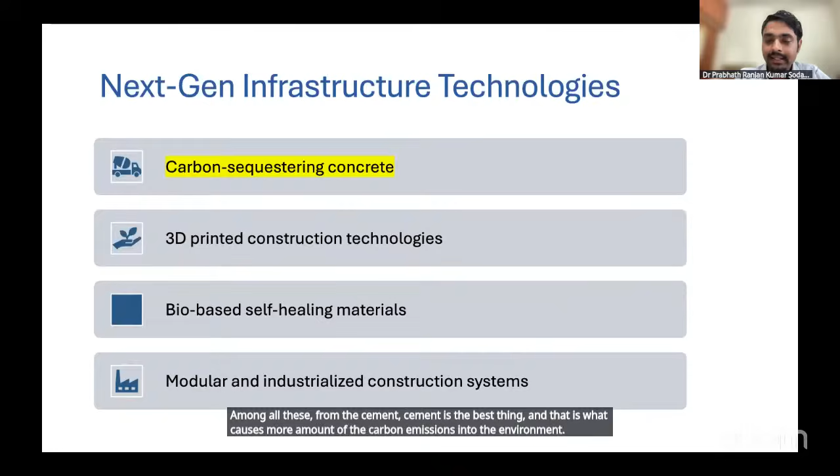The basic ingredients to prepare concrete are cement, fine aggregate, coarse aggregate, and water. Among all these, cement is the worst offender, causing the most carbon emissions into the environment. So how we can sequester this carbon dioxide is a major problem.

My professor, when I was working as a postdoctoral researcher at IISc in the Center for Sustainable Technologies, Professor Souradeep Gupta inspired me to work in this specific area, and I also got inspired by several research outcomes that occurred during the process of the research.

The basic information is that 30% of global industrial CO2 emissions are mainly because of cement production, out of all industrial emissions, whether you consider EV, electrical, or other engineering sectors.

India, among all countries, is the second largest cement market globally with continuous and growing production volumes among all sectors or countries. One more major problem is the scarcity of river sand.

Now there is a movement called Save the Soil, Save the River. If you continuously dredge out the soil existing in the river for construction purposes, there are a lot of changes in the ecological cycle because that changes the movement of the river, and other problems occur.

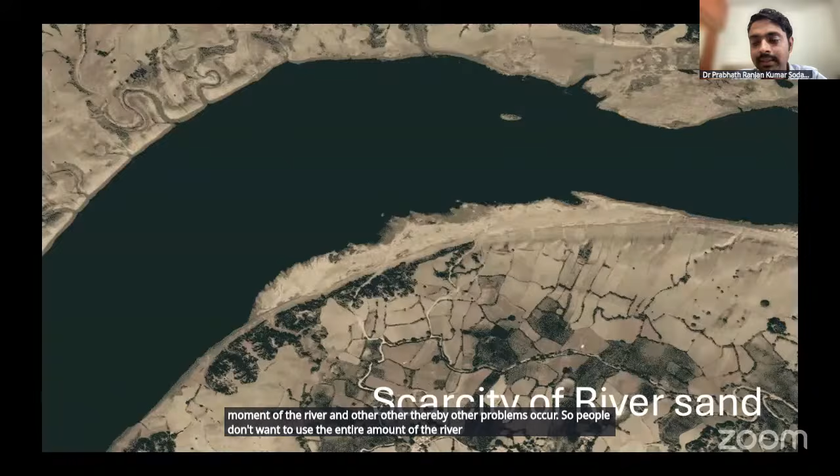So people don't want to use the entire amount of river sand. That's why there is a movement to reduce the use of river sand. This is one specific problem, and carbon sequestration is a basic solution for it.

So to address this problem of avoiding river sand, utilizing excavated soil from C&D waste is surely one solution—using locally available soils. We experimented with carbon sequestration instead of using normal fine aggregate received from river sand. We also did not use RoboSand or M-sand.

We utilized locally excavated soil, whatever soil is available near the construction sites. For example, when we try to construct a foundation, what happens? There will be a lot of soil available due to the excavation process as a pit.

The soil is directly utilized as fine aggregate and incorporated into 3D printing, and we have beautiful outcomes from that. So again, introducing the CO2—just now we discussed there is a lot of CO2 causing changes in the environment.

So this amount of CO2 emitted from the cement manufacturing process can be utilized as a positive aspect when we use the CO2 gas as a curing gas. We know concrete should be cured immediately after casting, after demolding.

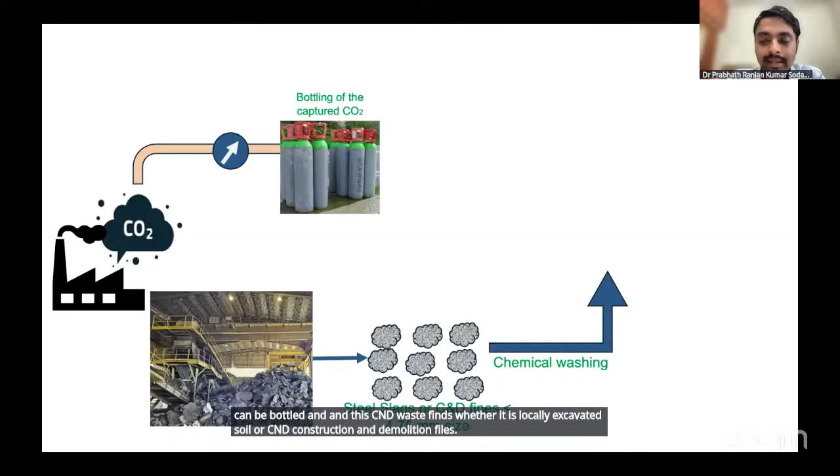So when we expose these concrete structures to CO2 gas, what happens? The basic science is that the carbon dioxide emitted can be bottled, and these C&D waste fines—whether locally excavated soil or construction and demolition fines—can be chemically washed and also utilized in the sequestering process.

That is one way of sequestering carbon dioxide into the aggregates, and the structure itself can also be exposed to this carbon dioxide gas, which will sequester the carbon dioxide and form calcium carbonate.

The basic science is that carbon dioxide reacts with calcium hydroxide, a byproduct of hydration. When cement mineral reacts with water, it generates a gel, CSH gel, then calcium hydroxide. That calcium hydroxide reacts with carbon dioxide and generates calcium carbonate.

Not all calcium hydroxide is reactive. We need a specific pressure, a specific humidity, and a specific temperature where the maximum amount of carbon dioxide can be sequestered.

That is what sequestration means—we are permanently converting this carbon dioxide into calcite, unless you heat the calcite again to convert it back into reactive lime and CO2.

So construction sectors, or prefabricated industries, can adopt this kind of science of curing using carbon dioxide and improve strength as well.

It also improves the strength because this calcium carbonate will densify the structure, then enhances the compressive strength, and enhances the durability and permeability, reducing the permeability.

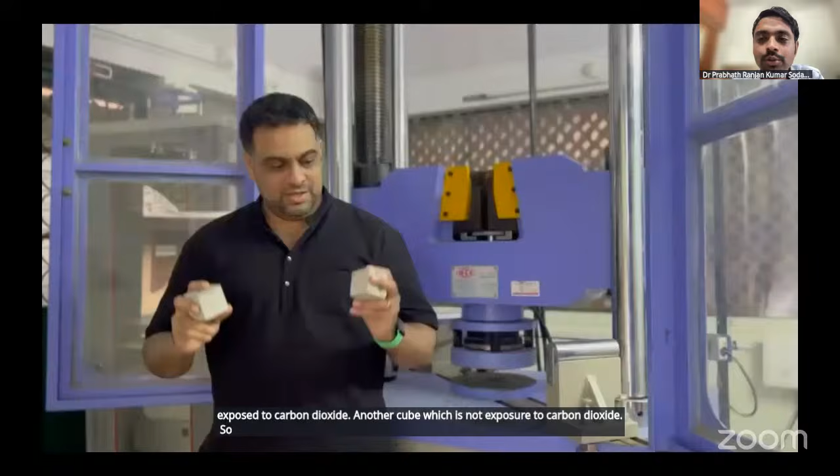He's a professor, my inspiration. From him I have learned a lot of things. In his hand there is one cube which is carbon sequestered, exposed to carbon dioxide, and another cube which is not exposed to carbon dioxide. He experimentally showed what is the difference in strength between these two cubes.

So I have two building blocks in my hand. One is made using Portland cement and natural sand. Another building block here is made using Portland cement, CO2 treated recyclable fines, and then cured using our CO2 curing technology. What I'm going to do is subject both of these cubes to a strength test, and let's see how they perform.

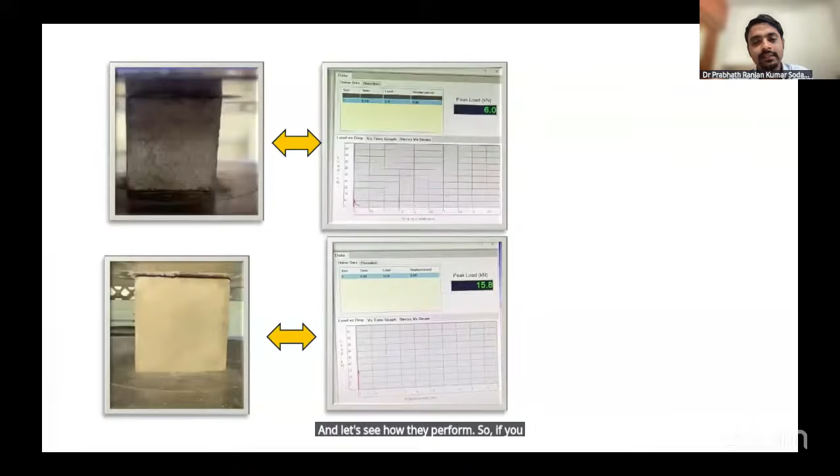So under specific loading conditions, the one which is actually there first is block 1, strength due to conventional curing. That is, conventional curing is generally where we cure in normal water, so we get the normal strength, whatever is expected. The strength of the second block shows a 30% hike in strength, the load carrying. The failure is...

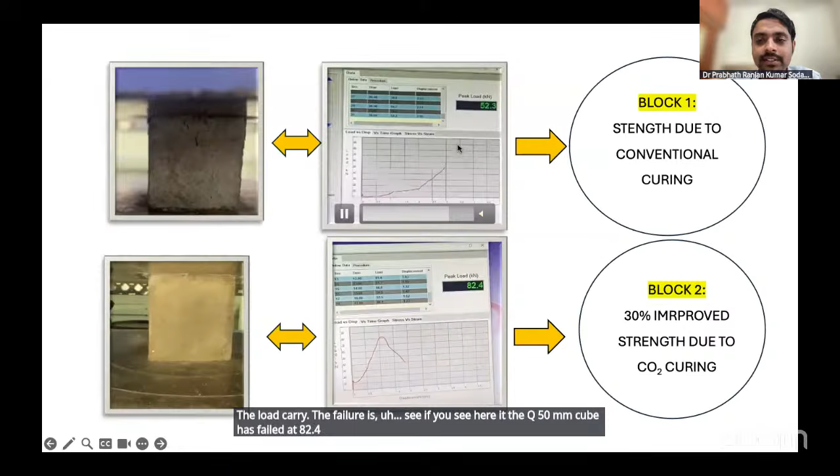If you see here, the 50 mm cube has failed at 82.4 kilonewton, and the conventional cube has failed at around 52.3, it will be close to that.

So this is the strength difference on the first day itself, the very first day. Carbon sequestration can be done in the initial days only. After casting, immediately we must expose this, because that's when the maximum amount of calcium hydroxide availability will be there for the reaction process of the CO2. So this CO2 basically mineralizes into calcite, improves the strength, and permanently stores into the infrastructure. This is how carbon can be sunk or absorbed directly through this reaction process.

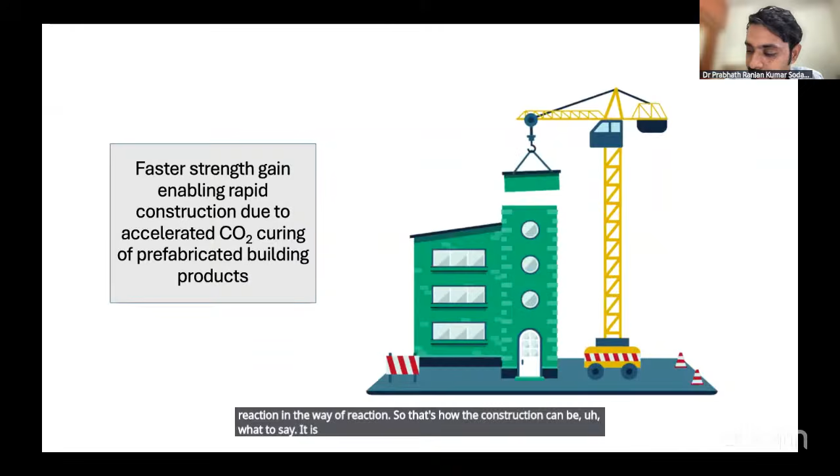So that's how this is one of the important aspects for the demolding process, faster demolding process, as well as faster deployment of the structures into service. So it is useful in that way.

And second thing, very important, is that everyone is interested in 3D printing. With 3D printing, although we don't need any formwork for constructing almost any type of structural framework, we can avoid molds, and we can construct any shapes, practically impossible using molds, can be done using 3D printing, as you see in this picture.

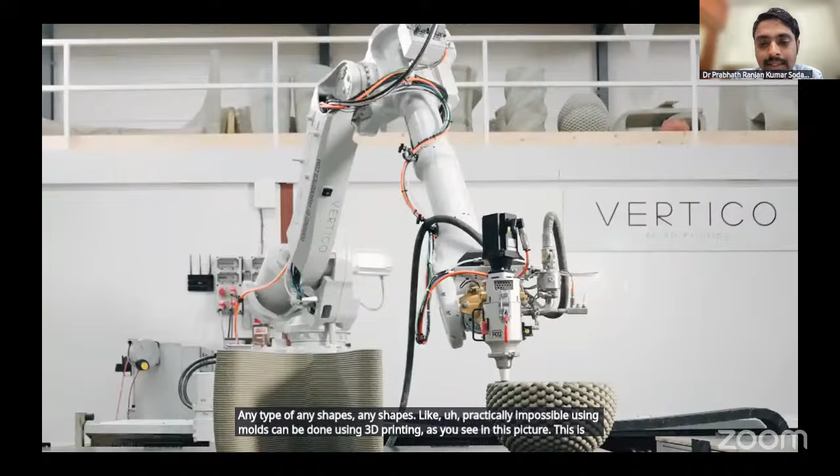This is one of the 3D printers, called a robotic arm 3D printer, using which we can construct up to a certain height. There are also other types of 3D printers available in the market, like gantry-based 3D printers, using which there is a limitation of height. Until the height of the gantry only, the structure can be printed. So there are limitations as well, but the process is very quick.

You can construct a wall within a day. In fact, if you properly utilize the resources, you can construct a structure within a day. It all depends upon the science of development of the material itself.

It's just like when we press a toothpaste tube, what happens? Material comes out, the paste comes out, but the paste will not collapse on its own, it retains its own shape on the brush, right? Similarly, if you design the material using specific chemicals or viscosity modifying admixtures, the layers will retain their own strength. This process is called buildability, a specific technical term.

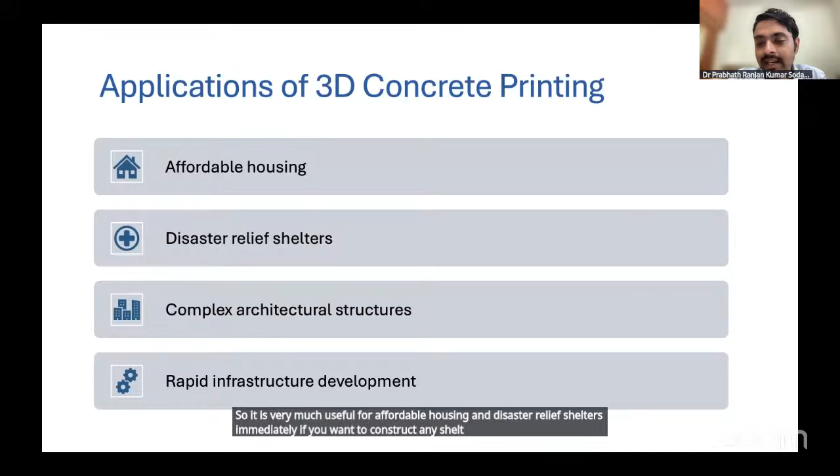I'm not going into too much technical detail of 3D printing, but I'll just show the applications of 3D printing here. It's very useful for affordable housing and disaster relief shelters. Immediately, if you want to construct any shelters, complex architectural structures can be printed, enabling rapid infrastructure development.

The color looks different from cement because we have not used only cement. We have used locally available soil, that is clay soil, which is actually non-expansive clay soil. That is, the mineral which causes expansion is montmorillonite in the clay.

So we choose a material which is not having montmorillonite, or at least having very less amount of that. We choose it, sieve it, and dry it. We directly developed the mixed formulations and started printing.

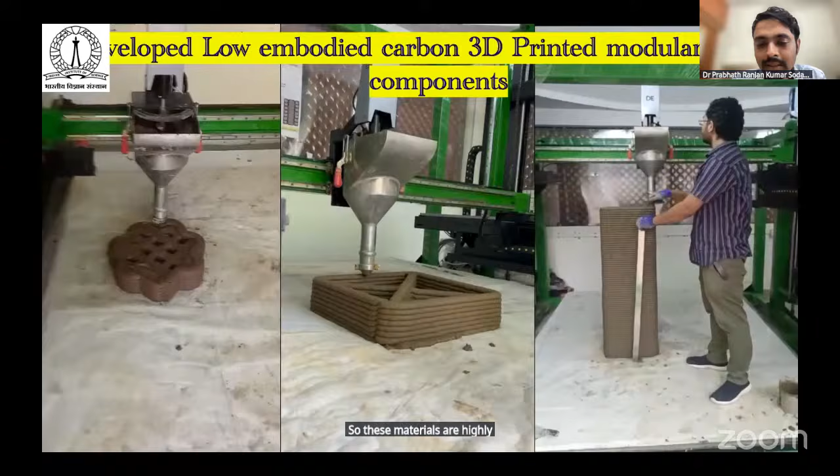These materials are highly low embodied carbon materials, because we are not using high amount of cement in this - we used very 30% cement only. It's very less. And there is another research using geopolymer, with almost zero cement, and 3D printing was awesome.

Structures were constructed at IISc. When you visit Bangalore, you can visit our printed structures still available at our research facility.

Apart from that, this is one wall - an attempt to construct a wall has also been done. So like this, we can construct. The time taken for this is around 2 hours.

Our research scholar has printed this, and it was modeled in Fusion 360. Then it is transported to the computer, where the printer changes it into layers, then it is printed. So this is another research, parallelly done with our collaborated university, IIT Roorkee.

We have done this as a part of our research work. They explored using their locally available soils as a fine aggregate replacement. And you can see there is a lot of discontinuities in the surface, in the quality of the layers.

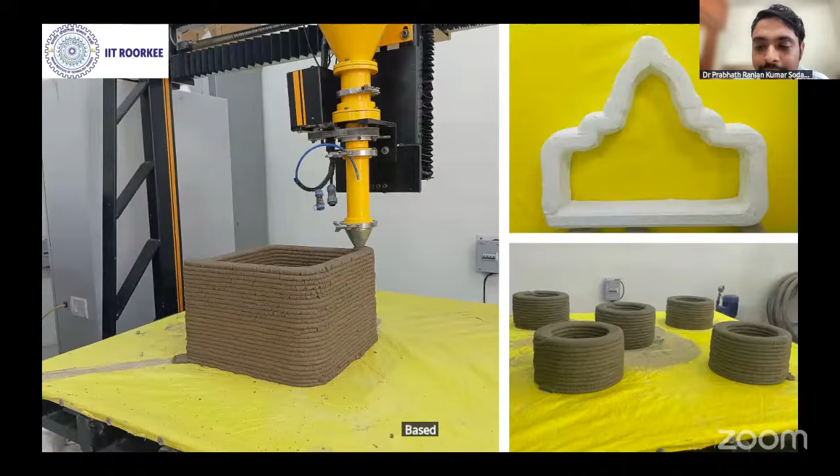From this, we can learn that there is a difference in the quality of the layers, quality of the printed material based on the ingredients that we use. Not all the locally available soils are useful for printing - we must test basic tests.

So these are certain other things which they successfully printed with a good extrusion quality of the layers.

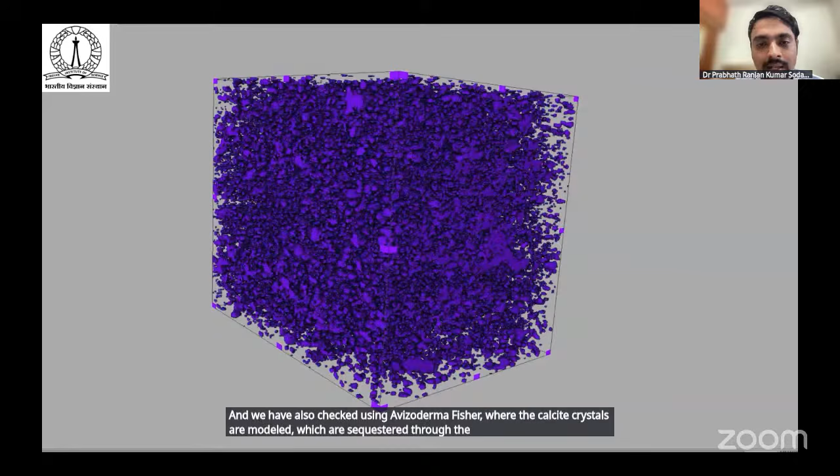So it's a highly densified material. In the cube, a specific portion was analyzed using this - it's a modeling, basically 3D rendering of calcite crystals.

So that was my research at postdoc. And as we discussed, the whole world is looking towards the sustainable goals, especially in the construction sector, which we are responsible for as civil engineers, to develop a resilient infrastructure, cleaner construction technologies through C&D waste and CO2 utilization.

That's what specifically we are addressing - sustainable cities and communities by maximizing the utilization of CO2, and responsible consumption and production by promotion of C&D and excavated waste recycling as new building materials. Obviously we require less resources, and at the same time we can utilize high amount of available resources.

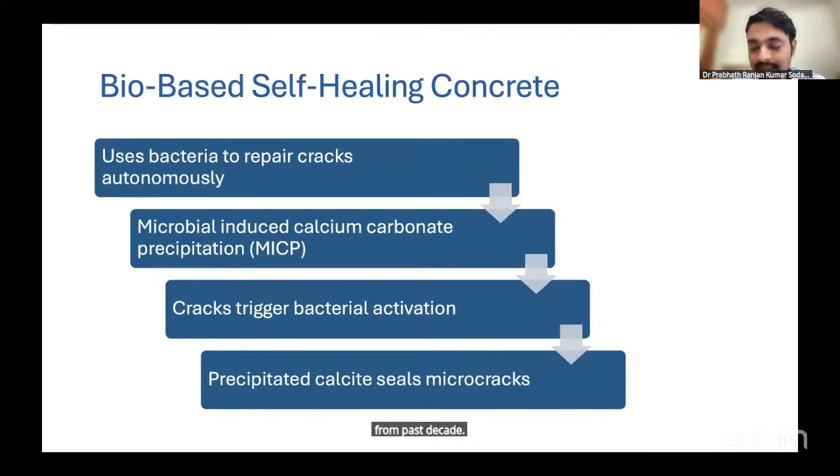Then the third important technology is bio-based self-healing concrete, or self-healing concrete, which is also a very much focused element or research aspect by several researchers on the globe from the past decade. In fact, my doctoral work is focused on this healing of micro cracks.

So basically, healing can happen in two different ways - one is natural healing and artificial healing. Natural healing means that cement itself, or concrete itself, when a crack occurs, naturally, because of the availability of secondary hydration products, a certain amount of the crack will be closed.

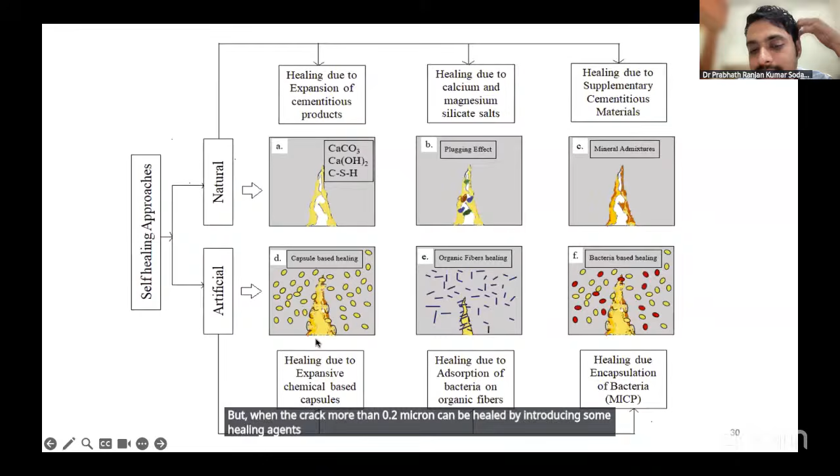That healing is limited to 0.2 microns, not more than that, so that healing is not going to close the entire crack. But when the crack is more than 0.2 microns, it can be healed by introducing healing agents artificially, which can be chemical based, organic fiber based, or by encapsulating bacteria.

I took the opportunity to explore the healing efficiency of bacteria, especially those which precipitate calcite. Calcite is abundantly available on Earth. In our bodies, whatever we eat forms certain chemicals that become calcite through our bones and teeth. We all have calcite in our bodies. Similarly, certain bacteria have the ability to precipitate calcite, called calcite precipitating bacteria.

That bacteria can be encapsulated into lightweight aggregates, polymers, or specific materials. Then those encapsulated aggregates can replace normal aggregate. This is the process of forming the aggregate, incorporating it into cubes, then testing the healing efficiency after several days and at several concentrations.

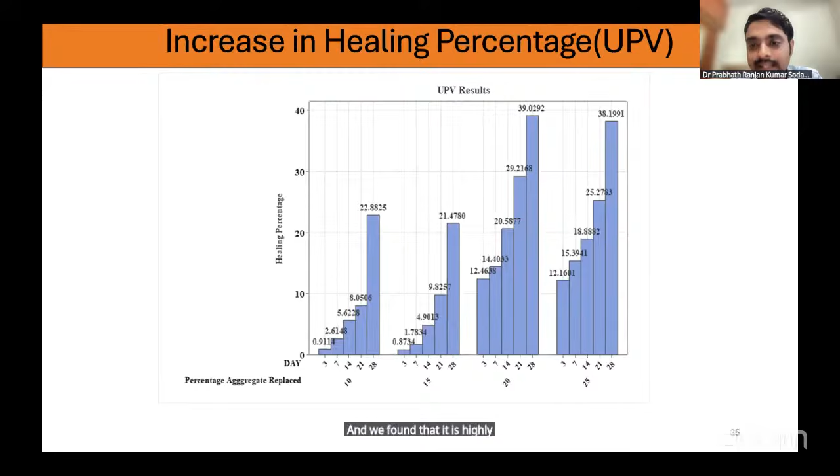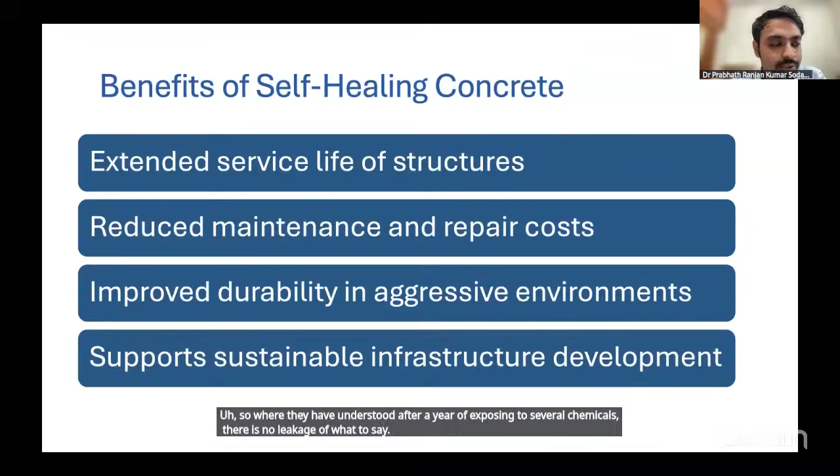Benefits of self-healing concrete include extended service life, and there are already people experimenting in Denmark. They constructed a beautiful structure, a 1,000 square feet slab, where after a year of exposure to several chemicals, there was no leakage due to chemical exposure. So we can avoid repairs if we adopt such things.

And the final technology is modular and industrial construction systems. Currently I'm working in modular housing, where people are experimenting with directly constructing volumetric pods, optimizing topology, reducing material utilized and weight of the structure without compromising performance—minimal on-site work and direct transport to site. One specific thing is utilizing EPS panels along with ferro cement.

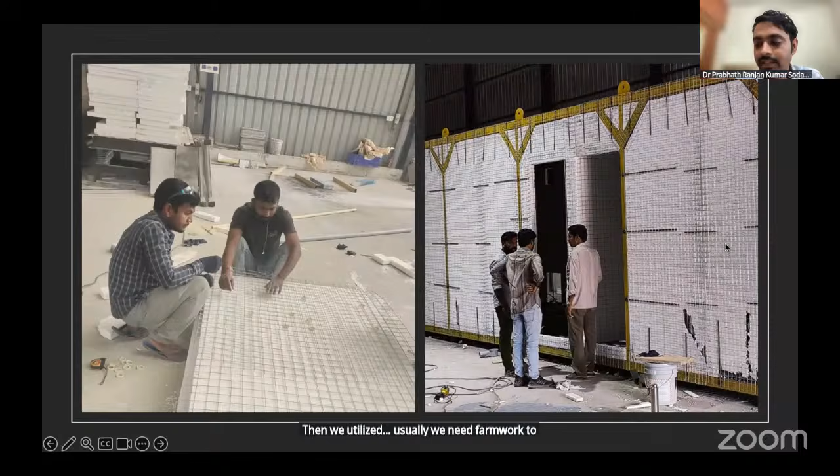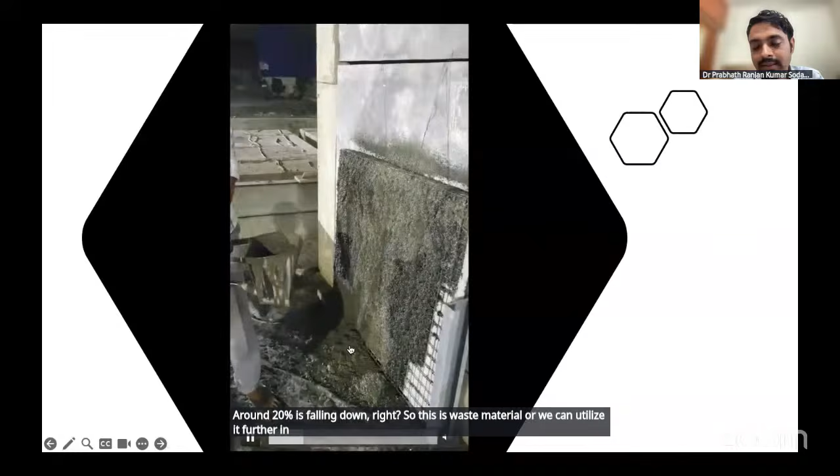Usually we need formwork to pour concrete, so to avoid that, I myself developed a specific material for spraying which should adhere onto the EPS panel. You can see here how this material is sprayed over the panel, so that the rebound is very minimal. Rebound means, if I spray 100 kgs of material over the panel, around 20% falls down—this is waste material, or we can utilize it further in finishing or other aspects of construction.

Basically we can reduce construction time using this method. One example is that we can utilize it for construction—this is at an experimental stage, what you're seeing in the video. Using this, we constructed a complete pod within days—actually 6 to 9 days total, including finishing and painting works. We can do this almost entirely if we have enough resources and people to support it.

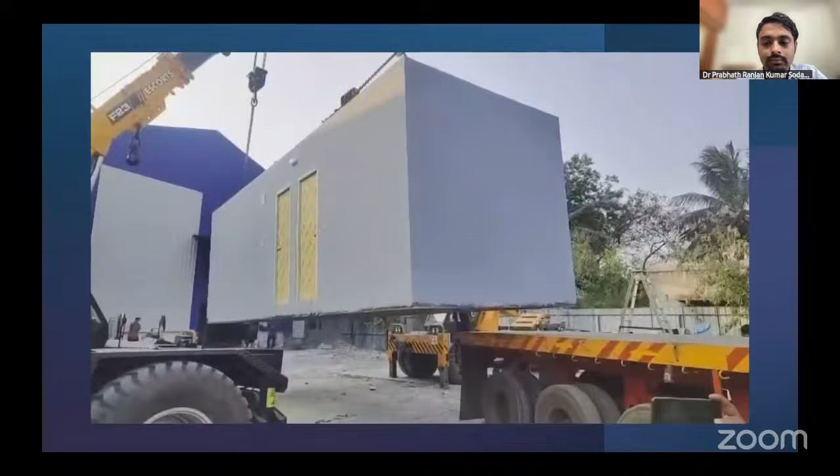Certain technologies like that already exist and people are bringing a lot of R&D into it. I am currently working to develop material, optimize the mix, and develop structural shapes. In future, the integration of digital construction into BIM, building information modeling, AI-driven design optimization, robotics, automation, and digital twinning are certain topics of great interest to researchers.

At my university, 20 people are working on digital twins, so people can explore anything. In the process of perfection, we are achieving certain products—this may not be a perfect product, but for the specific point in time and the specific problem, that is a solution.

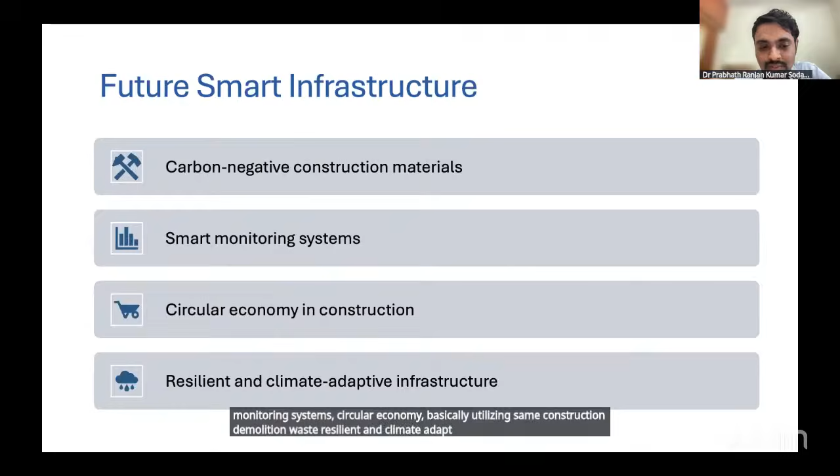If we are able to provide that, that's when our education is very much useful. Future smart infrastructure, carbon negative construction materials, smart monitoring systems, circular economy basically utilizing construction and demolition waste, resilient and climate adaptive infrastructure - these are certain interesting topics people can focus their research on if interested.

Everywhere people are exploring this in materials. This is my domain, so I am telling these aspects. I think I have consumed a lot of time, I'm going towards the end.

That's the key takeaways: infrastructure must transition towards lower carbon materials to avoid these things, and emerging technologies enable sustainable construction like modular construction, and integration of biology, material science, and digital construction, which lessens the time of construction and satisfies the demand of construction needs in society now, given rapid population increment and their needs to be satisfied.

Innovation will define the future of infrastructure. There is obviously room for innovation. People are thinking and implementing their thinking in products, which can cause faster construction technologies.

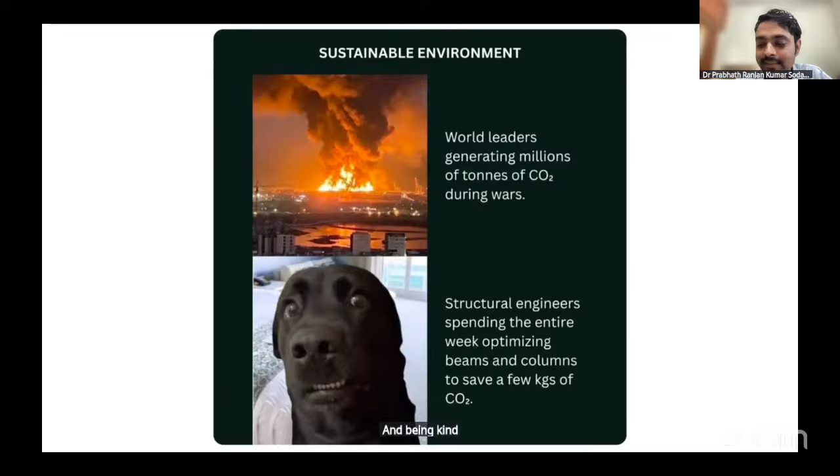Although I don't want to bring this down, we are all working day and night to reduce carbon emissions, and there are leaders causing generation of millions of tons of CO2. Although it's funny, the fact is that meaningful decisions should be taken at specific times instead of causing problems to the common public. I'm connecting this to our topic just to raise awareness - being kind and humane is very important at this time, as well as being innovative and showing leadership.

Anyhow, thanks everyone for giving me the opportunity to present this and giving me a chance to be a panelist here. To the entire team, it's great work to bring all these people together. Any questions and comments are welcome, otherwise we can move to the next panelist. Thanks a lot.

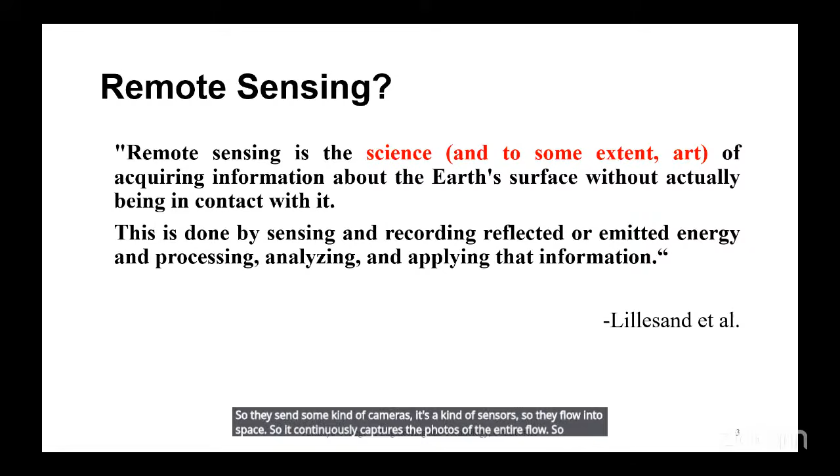So the same concept is used in satellites. Because how are you taking a photograph? Similar thing. They send some kind of cameras, which are a kind of sensors. They fly in space and continuously capture photos of the entire globe. Wherever we need, we can utilize that to monitor the changes that have happened.

So generally, when you look at remote sensing, there are different components. The first one is energy. You must need the energy. For example, there are two types of remote sensors: one is active, another one is passive. I will come to this in the next few slides.

So first, passive - the important source of energy is the sun. Because if the sun is there, the sunlight will fall on different materials and it reflects. So when it's reflecting, the sensor will capture that. It's simple, like a photograph.

When you take a photograph in good sunlight, it appears very clear and nice. But if your camera doesn't have any flash or something, if you take a photograph at night, you may not be able to see anything, right? Similar concept - we need sunlight as the source, which is reflected by the materials.

So that can be sensed by the sensor satellite, and that data will be transferred and downloaded from the satellite. It will be processed and analyzed, used for different applications. So this is the overall view about the remote sensing concept.

Here we need a medium, because the satellite is somewhere, the object is somewhere on earth, and we are receiving the signal somewhere, and we are processing and transmitting. So everything is being done in different places. We need a medium - what exactly carries the information? This is called the electromagnetic spectrum. You all know electromagnetic.

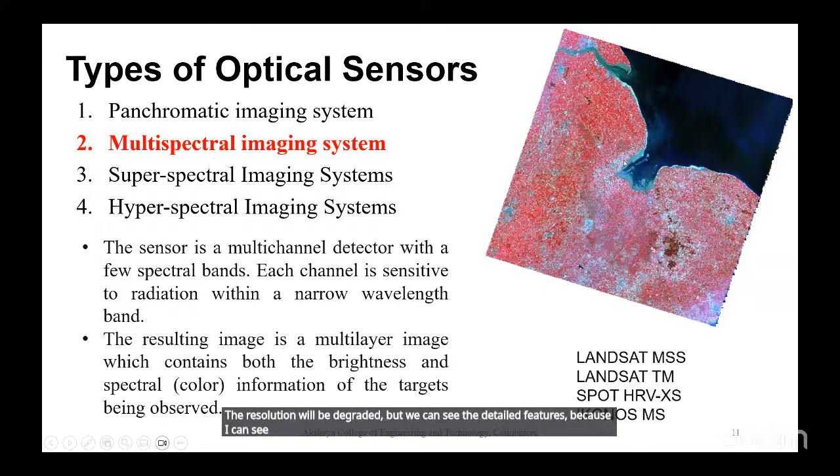Superspectral means it has more bands, okay, more spectral bands - it has 36 to 40 bands of energy, so we can see small changes. For example, if there's lake water or pond water, how much algae is there in the water, more greenery - even water itself, I can distinguish different things when you have more spectral bands.

Another one is hyperspectral. This is more advanced - you can use it for various applications. For example, a crop - whether it is healthy or has any kind of disease or water stress, or for geological applications, you can see if a particular area contains any kind of material like gold or silver or something, because it is very minute.

For example, take red color itself - everyone is wearing a red color t-shirt. Or in your university, they tell everyone tomorrow is a green day, so everyone wear green dress.

So not everyone wears the same tone of green. Green will vary from dark to light. There are multiple shades, so each and every differentiation in color can be easily identified using hyperspectral data. It has multiple spectral wavelengths, which can be reflected more precisely based on small changes in the characteristics of the targets.

So another one is the spatial resolution, which is very important, because it depends on which application you are using it for. For example, if my application is to monitor buildings in the university, I need more detailed information. Satellite data may not work, so I can use a drone, which gives information at centimeter resolution.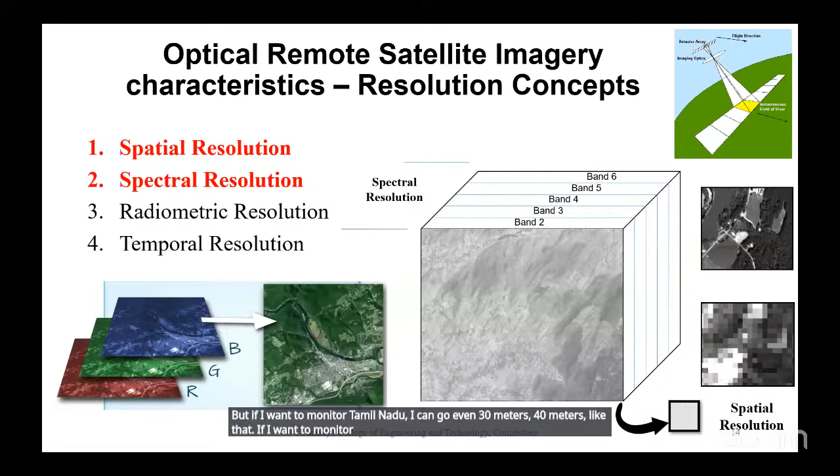But if I want to monitor the entire Coimbatore, I need a little coarser resolution, at least in meters. If I want to monitor entire Tamil Nadu, I can go even 30 or 40 meters. If I want to monitor entire India or the globe, I can go even coarser. So based on the application and the study, you have to select the spatial resolution.

Spectral resolution we have already talked about, so just skipping it here. Then there's radiometric resolution, which is very important, because there are 4 types of resolution. Spatial resolution is the pixel size, whether you are targeting a building, lake, entire Coimbatore, or entire Tamil Nadu, and you select accordingly. Spectral resolution is the colors, how many bands you are using for capturing things.

Another one is radiometric resolution. If you are using more radiometric resolution, you can get more detailed information. It's like when we purchase smartphones nowadays, what are the features you look at? The major thing is the camera's megapixels. If the megapixel is more, it's able to store more detailed information, meaning more radiometric resolution.

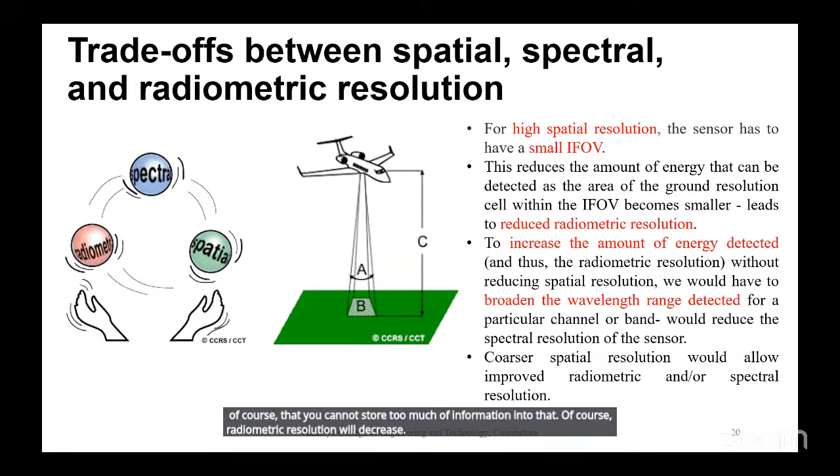But another important one is the temporal resolution. This is a must, particularly for monitoring infrastructure. If there are no hazards, no flood, no earthquake has happened, at least we need an image every year once, so that we can see any damage that has happened in the infrastructure. At that time, the temporal resolution need not even be 1 year; at least every month, if one image is available, that's enough.

But in case a flood has happened today, and I have one image from yesterday, if I have another image tomorrow or today, the temporal resolution is only 1 or 2 days. That is most important for disaster applications, because I can see, due to the earthquake or flood, how many buildings in that area have been damaged and what kind of buildings have been damaged, so immediate assessment can be made. And if a building is partially damaged, whether retrofitting or something can be done can also be assessed.

So far whatever we have seen is the remote sensing concept, the types of remote sensing, and importantly, resolution. There are 4 types of resolution: spatial, spectral, radiometric, and temporal. This is very important based on the application you are going to work on.

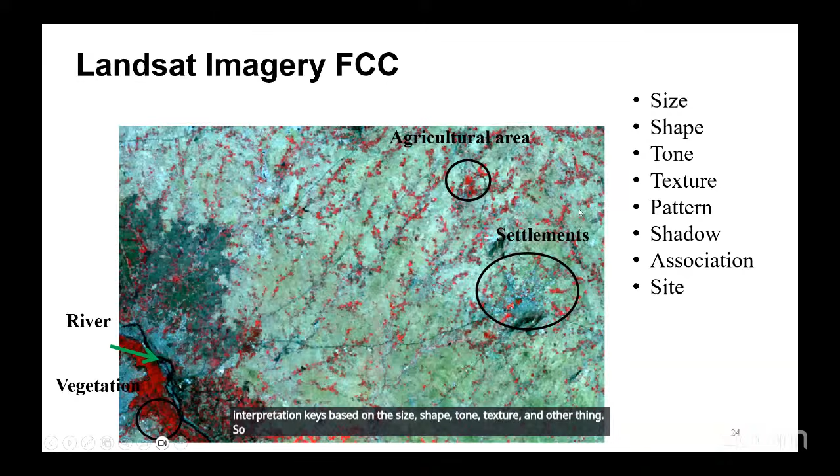There are various parameters you have to use, called keys. These are the interpretation keys based on size, shape, tone, texture, and other things. Based on that, you can classify the features in the satellite images.

For example, tone: if the tone is too dark or light, based on that you can see where more or less reflectance comes. For example, if there is a river, it's more smooth, mostly specular reflection occurs, so it will look dark. In a similar way, if there is vegetation, it reflects so strongly, so the tone, how bright or strong it is, you can classify based on that.

And there is size, which is very important. For example, there is a lake, pond, and maybe a river. Everything looks sometimes blue or dark colored. So how can you distinguish whether it is a lake, pond, or river? You all know, right? A pond may be smaller, a lake may be a little bigger, and a river may be a continuous system.

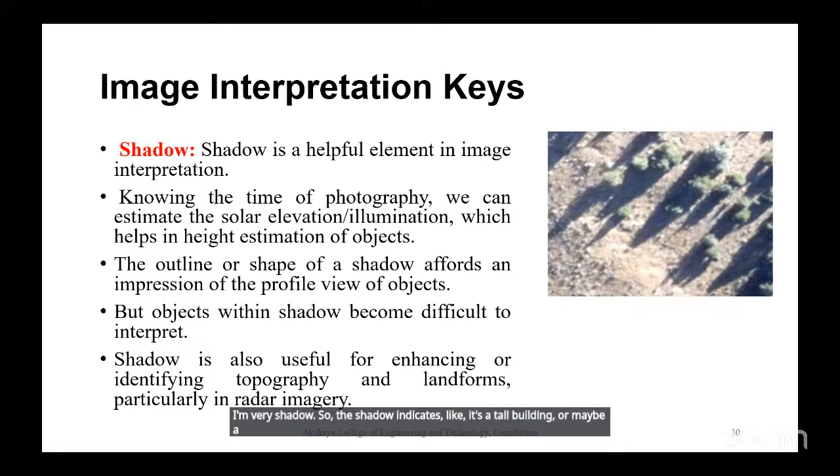Or maybe shadow - the shadow indicates it's a tall building or tall trees. That can be helpful to identify that there are trees there. And also association - you have to look at nearby buildings, what kind of other features are there. Based on that you can classify whether it's an industrial area, or a community, or maybe a cricket stadium. All these things you can classify.

So can anyone tell what exactly this is? This green mixed with some patches of gray color - how does it look? Now you know the interpretation keys. It's completely organized, so it looks like, of course, agriculture areas, because it's completely patterned and organized.

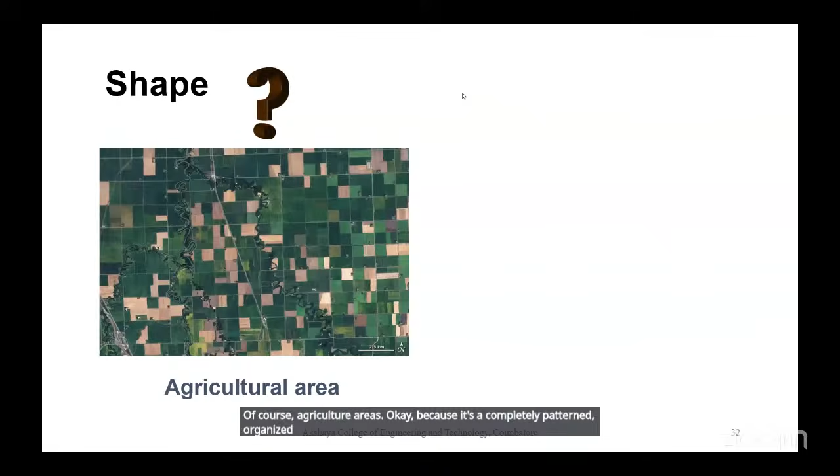That's what you have to learn when you look at a remote sensing image - to understand what exactly this is. I told you about association, right? There is one white building, and beside that there is a river going on, and maybe some good forest and other structures. What is this? I think most of you might guess - of course, it's the Taj Mahal.

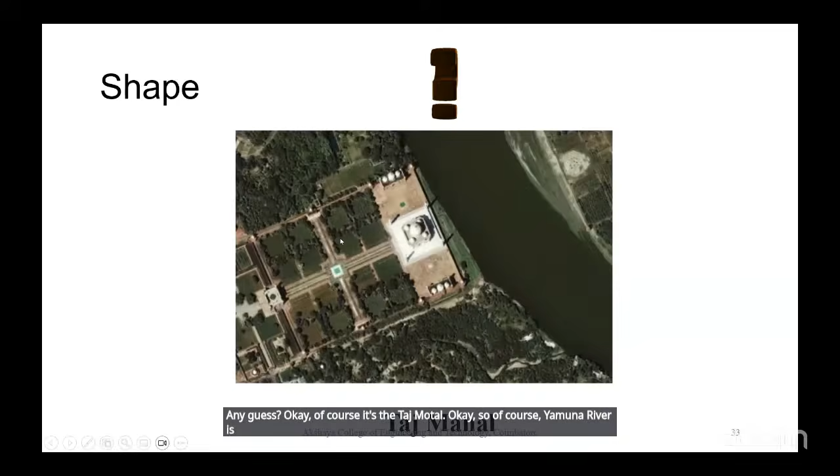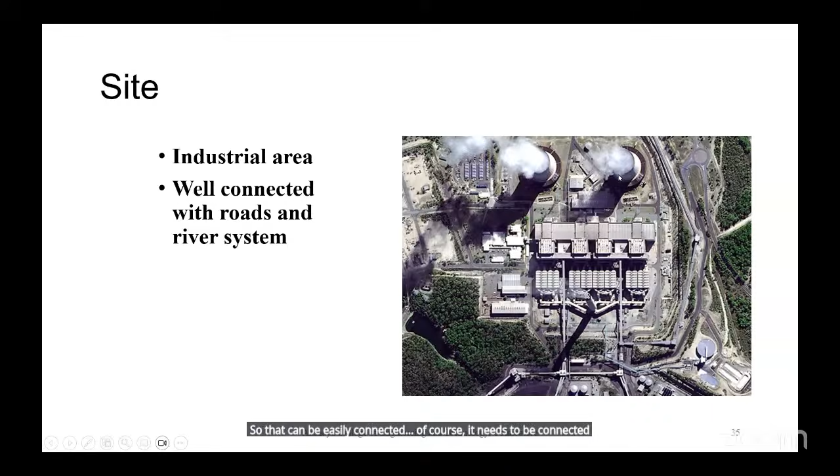Also tone - in different seasons, the same area, forest or something, the tone will change based on the greenery. That also you can interpret. Maybe as I told, association - an industrial area means the buildings may be isolated, not much other infrastructure nearby, because industry may be a little bit isolated. So that can be easily connected - of course it needs to be connected with roads and other things. Based on this you can easily classify. So this is how remote sensing concepts have to be utilized to understand the features.

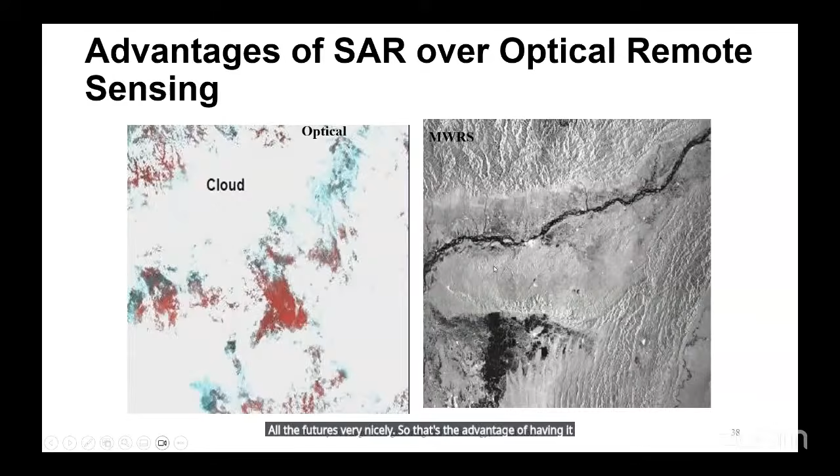Remaining part is completely cloud. But at the same time, if I capture the radar data, I can see all the features very nicely. So that's the advantage of having it. But it is only black and white. You cannot see any colors because it's a simple backscattering one.

So I'm just skipping these things. There are different applications you can use the radar data for. And I will directly go to the disaster - how these concepts of remote sensing can be used for disaster.

So there are various disasters that happened in India. Few of them I just put it here. The Kerala flood of 2018, and of course recently Wayanad also has happened. Many people dead, a lot of buildings and other things passed away.

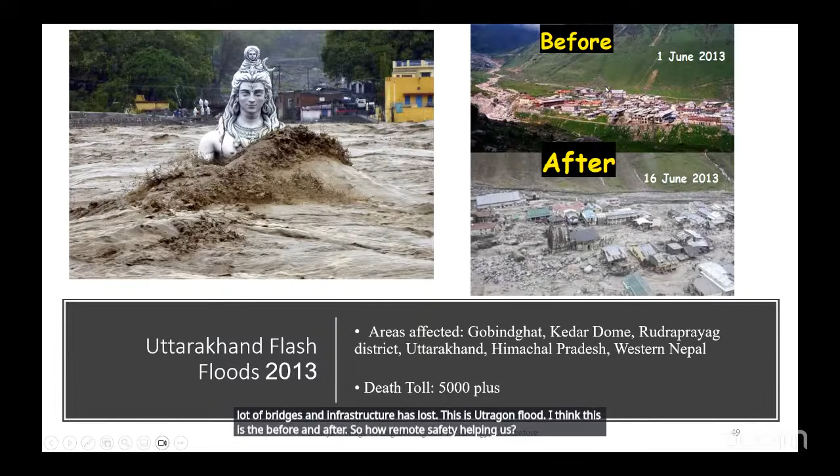This is the Kashmir flood that happened in 2014. Around 500 people dead, a lot of bridges and infrastructure lost. This is the Uttarakhand flood - before and after. So how remote sensing is helping us determine what buildings have been damaged, what changes have happened after the flood. And this is, of course, the tsunami.

So how will this remote sensing help? For example, this is New Delhi in '89 and 2018. You can see the changes - the purple color is almost red mixed with greenery. The purple color is the urban areas. So we can easily see Bahadurgarh and other areas were not much developed, Noida and all. You can see how the urban areas spread - urban sprawl, you can easily monitor.

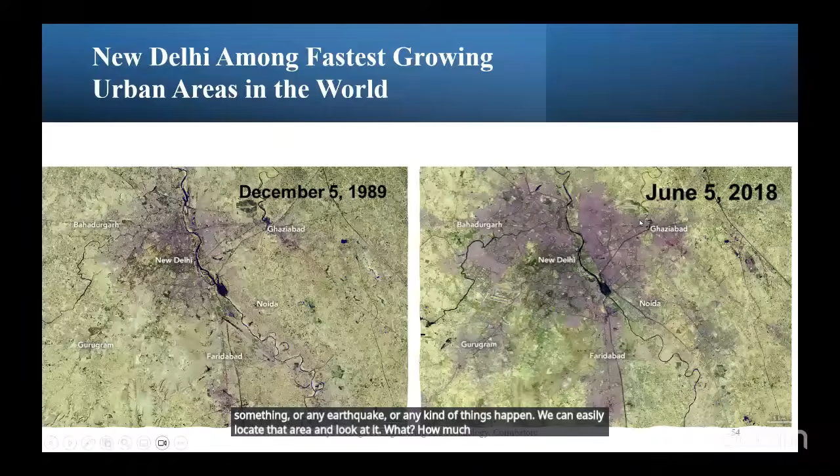This is the spring flood that happened in the USA. You can see how much the river width and other things have increased - overflow of the river system.

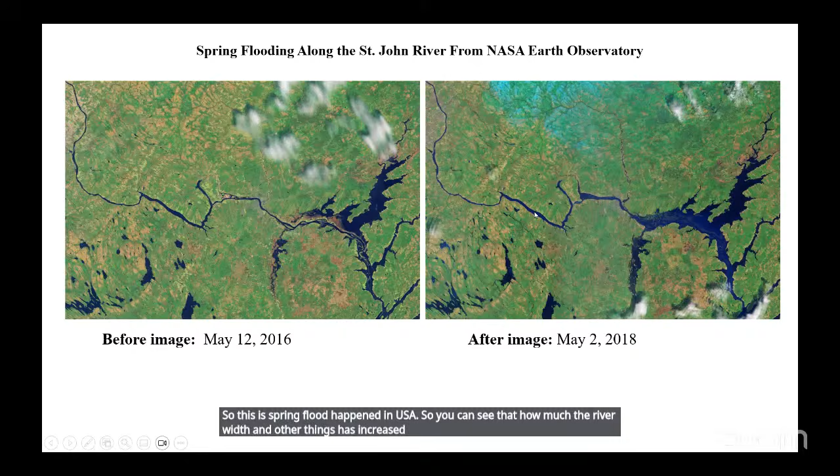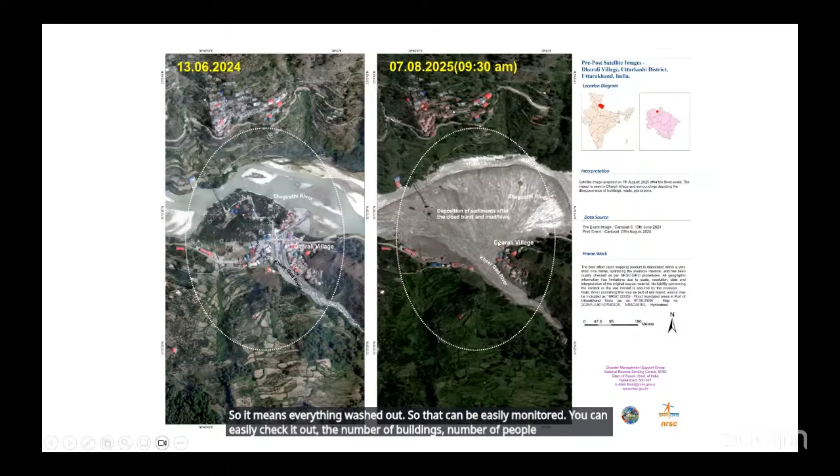And this recently happened, I think Dharali, Uttarakhand, due to that kind of landslide. This is before - you can see the buildings and other infrastructure, after that everything washed out. That can be easily monitored - you can check the number of buildings, number of people living there, how much has gone, how many people might have disappeared. All these things you can easily estimate.

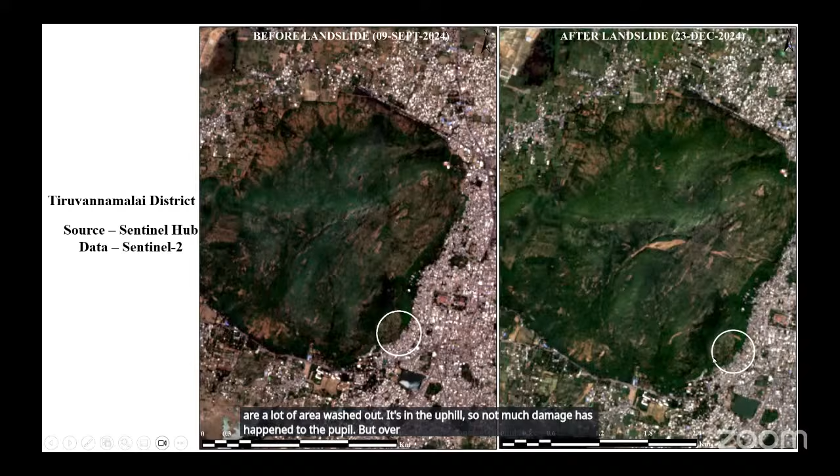Tiruvannamalai, we have that hill, right? Small hill. There was a landslide there, I think in 2024, about 7 people dead, including 5 children. So we can see this small hill. This is completely due to the rainfall. You can see there are a lot of changes that have happened in the hill, a lot of area washed out. It's at the uphill area, so not much damage happened to the people, but over this small area when the damage happened, a big rock fell down, so that 7 people died.

So this is a wildfire that occurred in 2025. This is the before image, you can see it's completely greenery. After that, this entire area has been washed out. You can easily map and see how much area in hectares has been destroyed due to the forest fire.

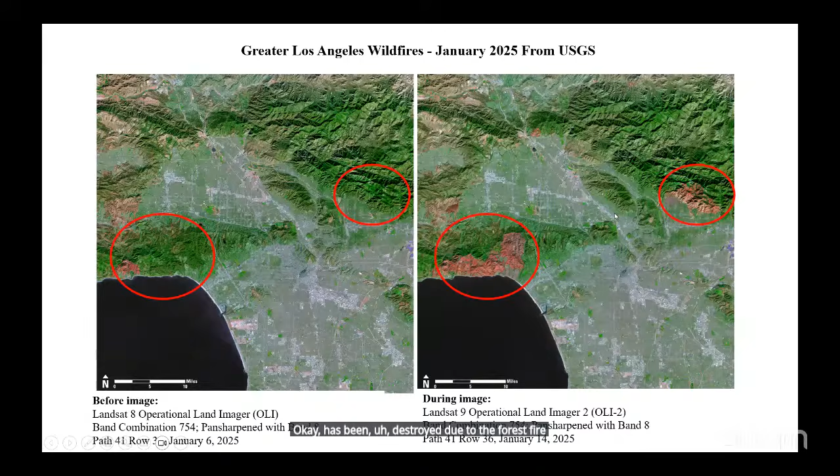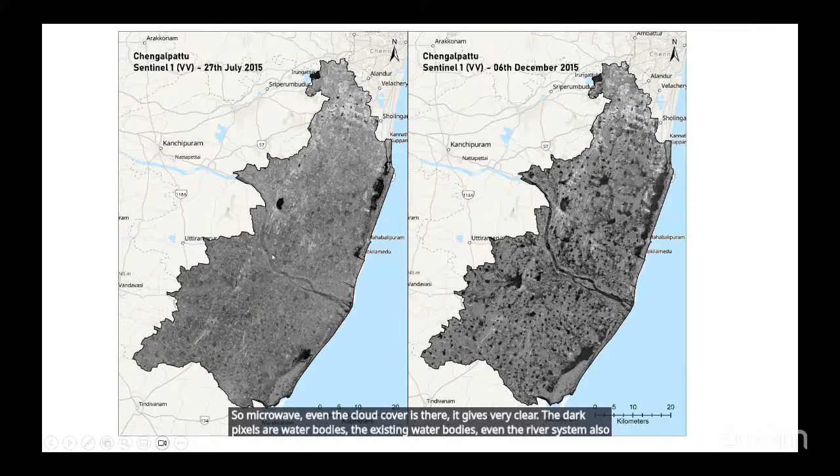So this is our Chengalpattu region. This is not optical data, so far whatever we have seen is optical. This is microwave data. With microwave, even when cloud cover is there, it gives a very clear picture. The dark pixels are water bodies, the existing water bodies. Even the river system was not having any water at that time, but after the flood, you can see how much water is there over that area.

So I'll just stop here. It means that we are having a very good tool in remote sensing. Now data is openly available, so this can be extensively used, based on the application and the area, to monitor infrastructure. Then, of course, based on that, remedial measures can be taken.

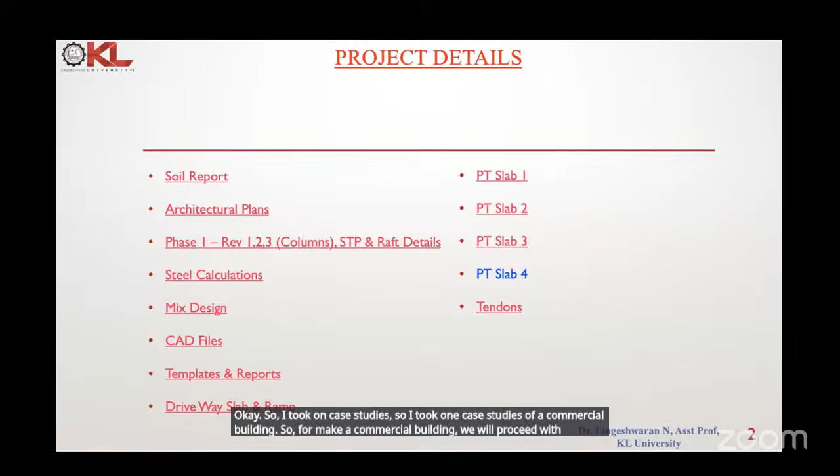I took one case study of a commercial building. To make a commercial building, we proceed with the soil report, plans, then details of columns, PT slab, PT beams, calculations, and structural designs. So many parameters will be there to start a project.

With this we have the architectural plan. So if we have the architectural plan, we will go with the structural plan and we will go for implementation on site. Why I am showing this architectural plan is, first of all, you have to know how the infrastructure is developing in and around the place and in and around the states.

Actually I am residing in Vijayawada. It is near the new capital of Andhra Pradesh, Amaravati. From my place Vijayawada to Amaravati it is around only 30 kilometers. So you can see here so much development. Recently they have given a new start called Quantum Valley, and so many infrastructures are developing here.

So I took one case study of what I worked on in this, to show how I came up with next generation ideas and how we can utilize the material further. So this is the architectural plan.

This is slab 1, PT slab 1. It is a total 4-story building. You can see this is PT slab 2, and the total area is around 35,000 square feet. This is followed by PT slab 3 and PT slab 4.

So the first 2 floors are taken by Westside, for purchasing those things Westside took them. And the third and fourth floors are occupied by a hotel. So this is the one.

So this is the time of construction, to get an understanding about the PT slabs. This is slab one, you can see.

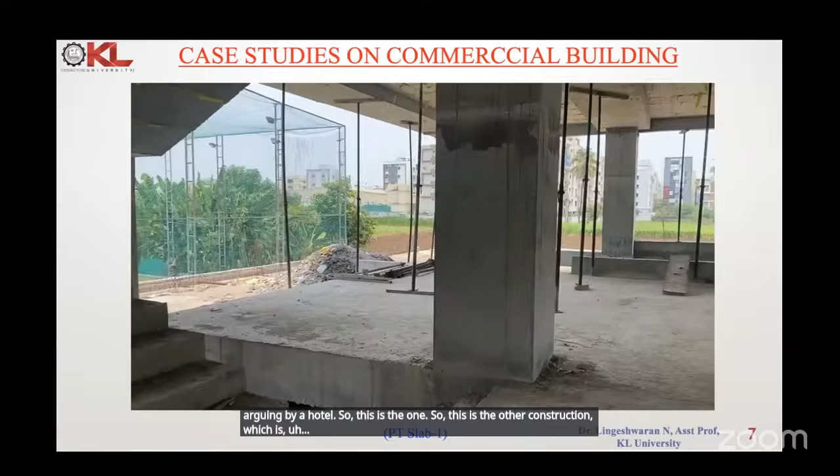I think you can see the video. Actually audio I didn't get anything, that's what I'm giving. So why I am showing this video is, the client wants the entire space and the utilization should be very clear.

So he doesn't want to waste any space. Anyway, you know when we go to the site, a client always wants to construct his slab area, everything end to end. So here the motto is how, by utilizing, we can come up with new materials, and how, if we go to RCC slab versus PT slab...

If I talk about PT slab, we can reduce the number of columns and the number of beams. For example, on this right side, it is around a 32,000 square feet plan area, but you can see we completed the total with only around 32 columns.

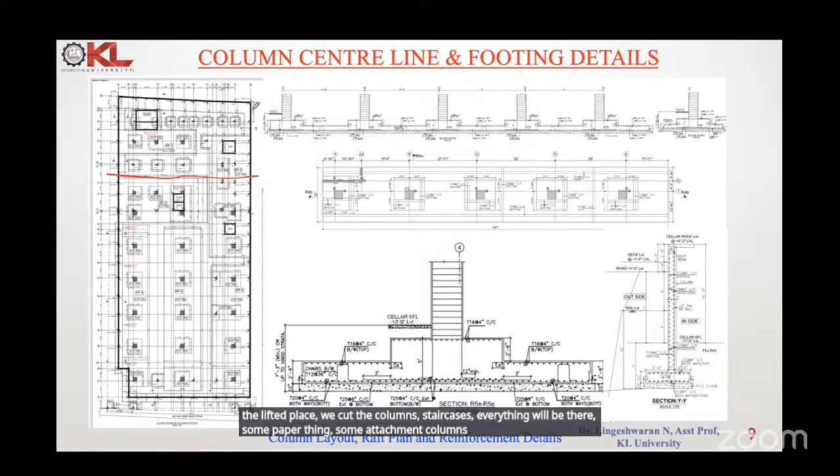So this is the main slab part 1 and part 2. In this entire thing we completed within 18 columns, and at the lift place we kept the columns, staircases, everything, some attachment columns. So when we go to the top, the columns get reduced. That's the reason we are going with PT slab.

So why I am showing this image is to show the resources, how much sand will be there. Actually it is very near to the Krishna River region, so in the Krishna River region the soil will be available, sir.

So when we go for footing, we have to go with a very heavy foundation. You can see here how the mat is there, bottom mat, top mat, and after the concrete. This is the one, the raft is completed.

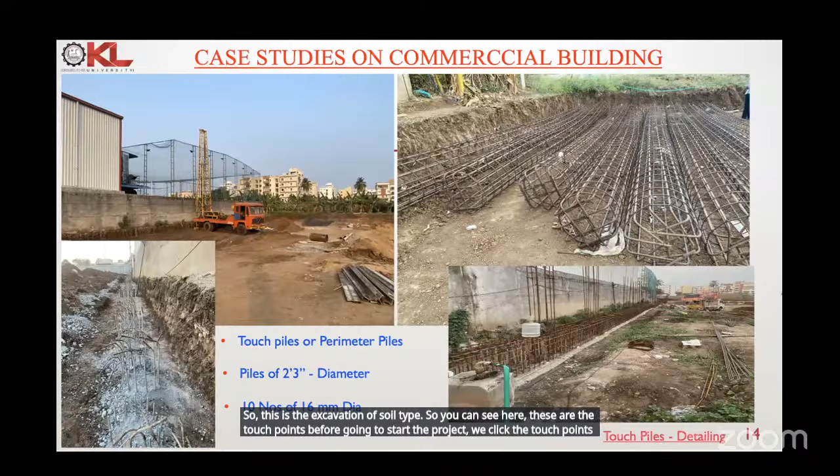This is the excavation of soil type. You can see here, these are the touch piles. Before starting the project, we kept the touch piles to resist the soil from falling down from the neighbor land or anything. That is the purpose. So you can see here how much PCC and how we are pouring the concrete using PCC.

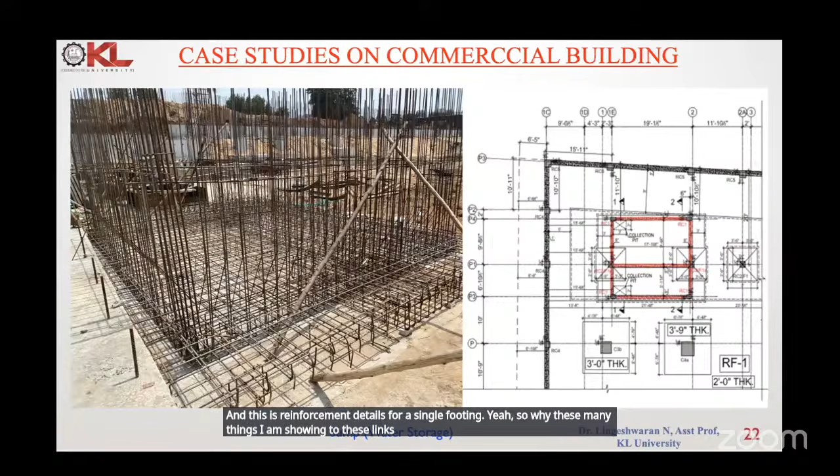So you can see here the quantum of concrete, reinforcements and rafts, everything. And this is concreting time. This is reinforcement details for a single footing. Why am I showing you all these things? You can see this is the sample details, and the concrete is going to follow.

So I first started with a commercial building. Like I informed, 4-story buildings, and for the 4-story building PT slab 1, 2, 3, and 4. Followed by I showed some raft footing. You can see here, this is raft 5. Actually in our entire 35,000 square feet area, we have a total of 5 rafts.

So in the 5th raft, this is the steel calculation. You can see we are using 16mm dia - 14.82 tons, 20mm dia - 21.21 tons, and 25mm dia - 9 tons. So total here we are using around 40 tons of steel.

So you can think about alternatives. Actually, this is the footing, so we can use GFRP bars. How we utilize GFRP bars in our lab, everything, I will show in the upcoming slides. So I'm giving a hint.

When we are going to give the structural design for a commercial building, the client is asking about quality. So when we talk about fly ash, or introducing fiber reinforced concrete, first of all the client is not ready to be convinced why we need to go for alternate materials. For them, there is no need of saving the amount, no need of any economical structural design or economical materials. We will go with the normal traditional method.

But as civil engineers and structural engineers, we have to teach them - this is the reinforcement details we are providing, and we can alter the material like that, we can do it with some proofs. So the proofs, I will show you how we convince the client, everything, on site.

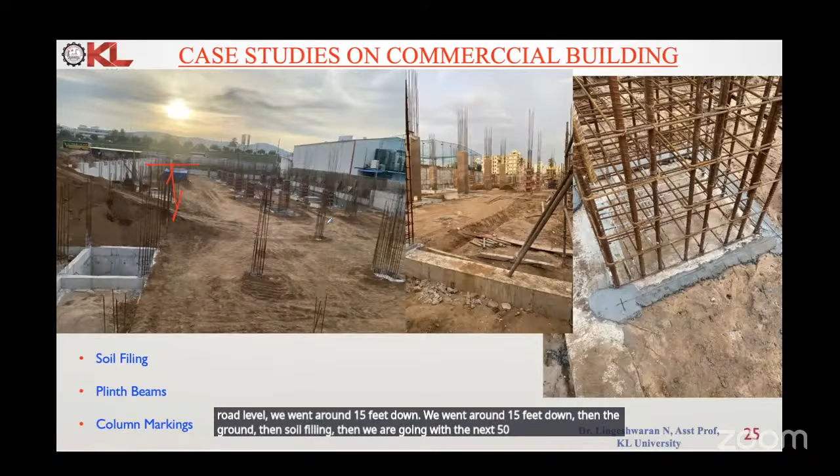So this is after the completion of soil filling. The next one is compaction, and we will keep termite treatment. These are all normal procedures. So you can see here.

So this is the total PCC utilized in this 35,000 square feet land area. You can see here, this is the total final area after reduction, 28,728 square feet. So we went with 5-inch PCC. Total cubic meter we used is 339 cubic meters of concrete.

So for 339 cubic meters of concrete, for every 7 cubic meters of concrete we are using 12mm - 417 kgs, and 20mm - 730 kgs. Around we are using almost 1100 kgs, 1.1 tons of aggregate. So for the total 339, we are using around 55.54 tons only for PCC.

So think about when we are going to another 5 slabs, how many tons of aggregate we are using? That's what we need some alternative for - we have to go with recycled aggregate. So when we go with recycled aggregate, to check the strength, we can use fibers like 0.5%, 0.25%.

These all we have to make a note of and inform to the client. So after these things I informed and we went to him and explained that you can go with fly ash. You can reduce cost because government is giving tax benefits to those who go for new materials like fly ash, GGBS, fiber reinforced concrete.

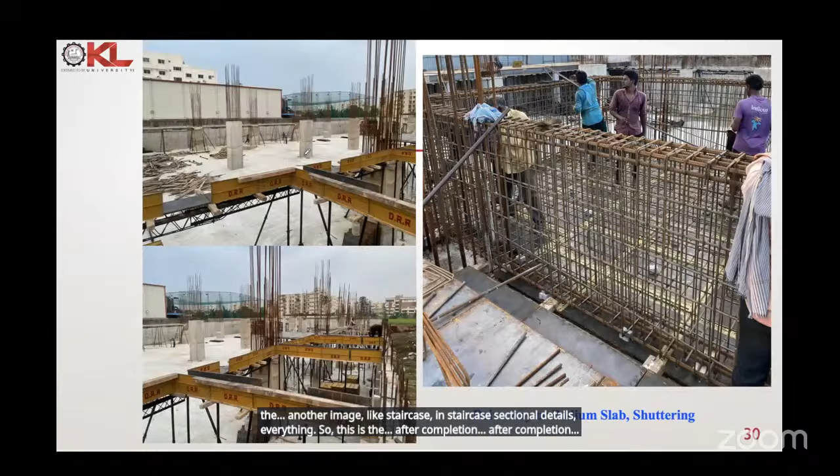So this is another image showing staircase sectional details and everything. This is after completion of the PCC. This is your podium, like the car parking area, PT slab 1. You can see this is the escalator area.

And this you can see is the entire PT slab 1, this entire area. This is the occupied area. And these places wherever we kept on the outside, that is for car parking, meaning the car driveway. And here inside, the opening will be there. You can go with and park the car there.

So this is the reinforcement details. I don't need to explain more about reinforcement details, everything. I just took this as a case study, and you can see here.

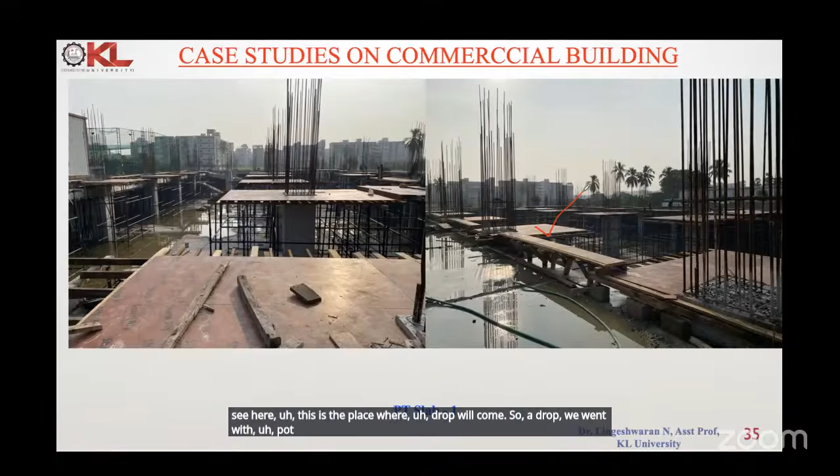This is the place where the drop will come, so for the drop we went with wooden boards, you can see here. For the remaining place, the client was not ready to invest more amount, so he went with steel boards. So here and there we can think about any replacement, which material we can use continuously for more than 10 to 12 projects. Like that we can think and proceed.

So we are working on that further. And the next one is PT slab, I don't need to explain everything. After that we did some testing. So you can see here how much concrete we are using from morning to evening. On that day we used around 140 trucks of concrete. So this is the completed structure.

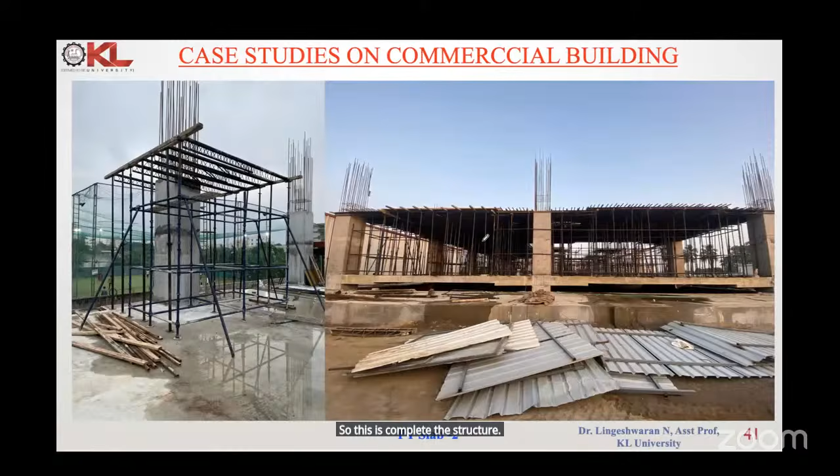Actually, infrastructure is needed, we have to go with it. Why? Because as we are a developing country, we should go with infrastructure. In Amaravati, in and around, day by day, a huge amount of concrete is being delivered to sites. We ourselves use per slab around 340 cubic meters. So altogether, when we went for the entire structure, we crossed around 2000 cubic meters. So that is the one point.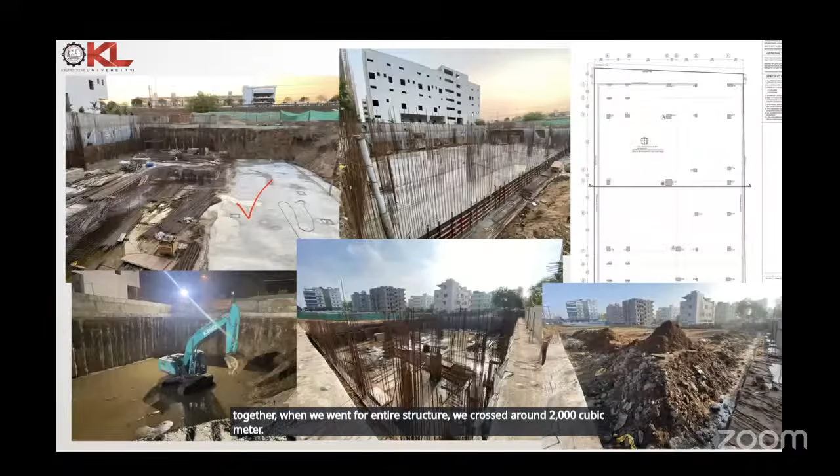So that's what I informed my students, to think about and look into replacement of everything. So one of my students wanted to work on recycled coarse aggregate, so he went with recycling of dismantled coarse aggregate in cement concrete.

And one more thing you can see here, it's not only aggregate, he will add steel fiber too, everything. But once the work is completed, for the next webinar, if I get a chance, I can explain it to them. So this is the literature review he completed and finalized.

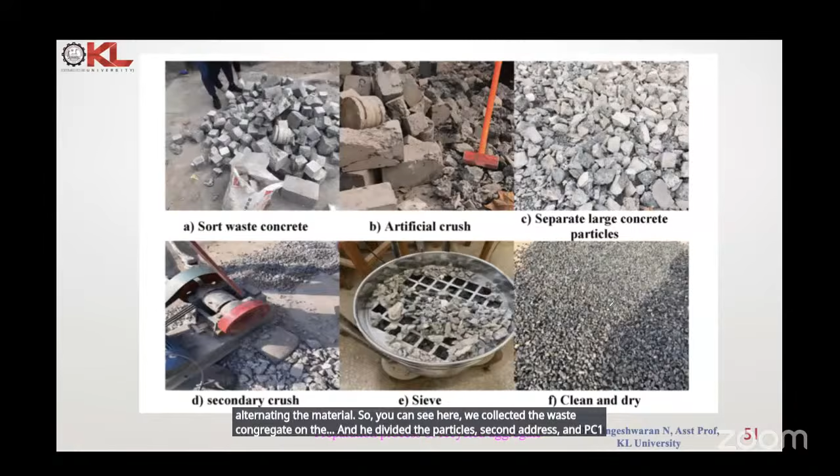We have to go with reduce, reuse, and recycle, and effective management for alternating the material. So you can see here, he collected the waste concrete and did an artificial crush, divided the particles through secondary crush, sieved, cleaned and dried it, and went with it once again for the aggregate. So you can see this is the preparation process of recycled aggregate.

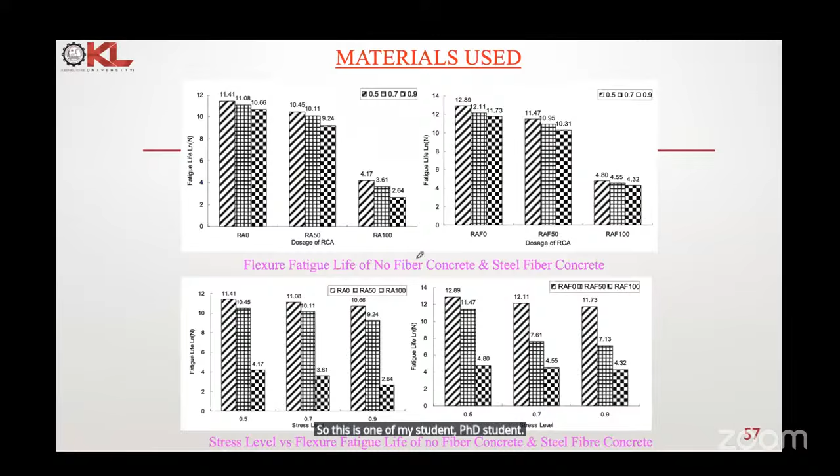So this is one of my PhD students. He did and is working on that. He is trying steel fiber, polypropylene fiber, and he is going with hybrid fiber. And one more study we did was an experimental study on biofibers in concrete.

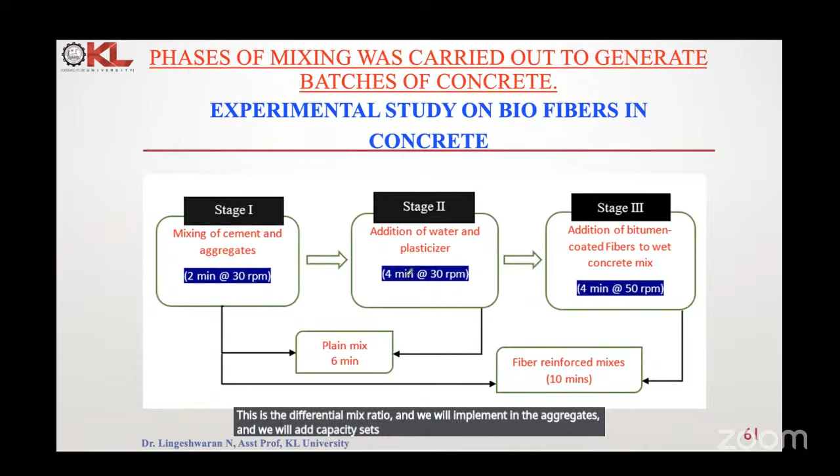So these are the different types of mix ratio, and we will implement it in the aggregates and add additives to get the concrete. Once the concrete is ready, we went with some tests, and these are the basic tests. I don't need to explain more about that.

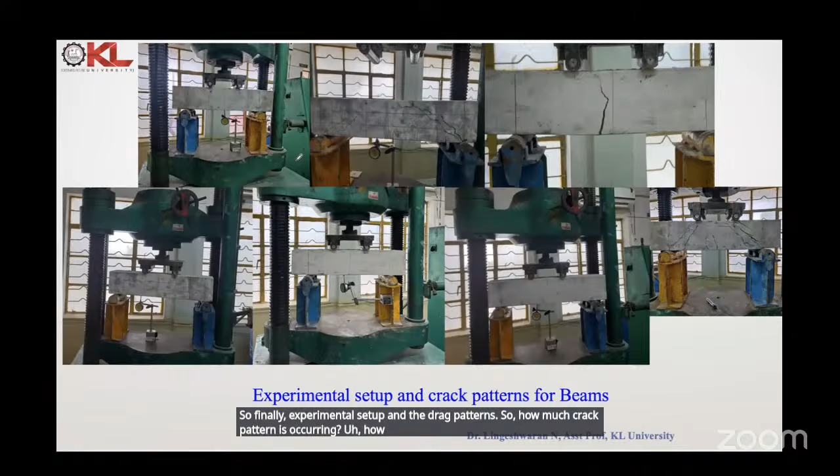Then we did the casting of beams, using the same proportion. Finally, the experimental setup and the crack patterns. So how much crack pattern is occurring, how it will fail, to know the characteristics of the coir fiber and plastic fiber. And this one is the SEM analysis.

After the work is completed, we make it into a document for readers, to make researchers aware that such type of work is going on.

Next, my topic is like first I did recycled aggregate, and next I followed with fiber and plastic fiber.

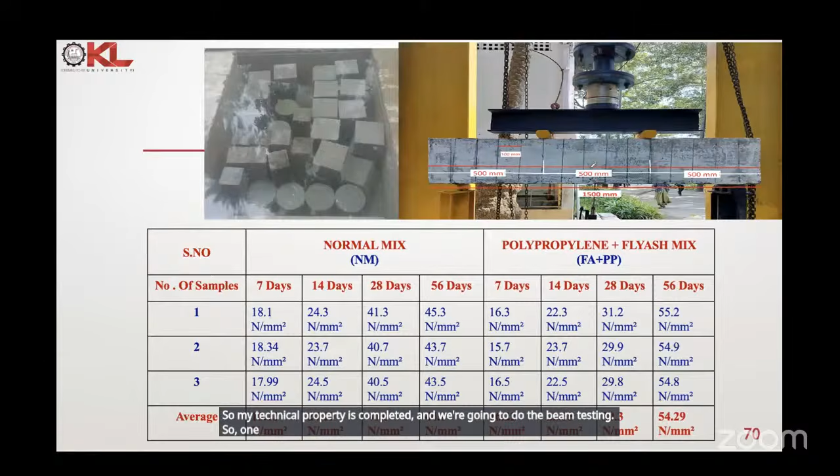So here is the normal mix, fly ash mix. Actually FA is the fly ash mix. So we did the mechanical properties testing, and once completed we went with beam testing, one normal mix, and another with polypropylene GFRP bars.

From this, what I need to convey is that recently we are working on a 12 storey slab building. So how they made the plan, the mode of the project is 2 basements for car parking and remaining 10 floors for residential.

For the 2 car parking levels, one slab is going to come, that is your PT slab, and another will be at the ground level. At the ground level only soil filling is enough, but the structural consultant informed us that we need to go with reinforcement also.

At the time, I got a project, meaning they came to us at KL University to consult on it. I and my senior professors were involved, and I informed them about GFRP bars. In the end, they were ready to go with main reinforcement as steel bars and distribution reinforcement as GFRP bars. We could convey this because at first they weren't ready to go with anything, but we had to speak with our results and experimental work.

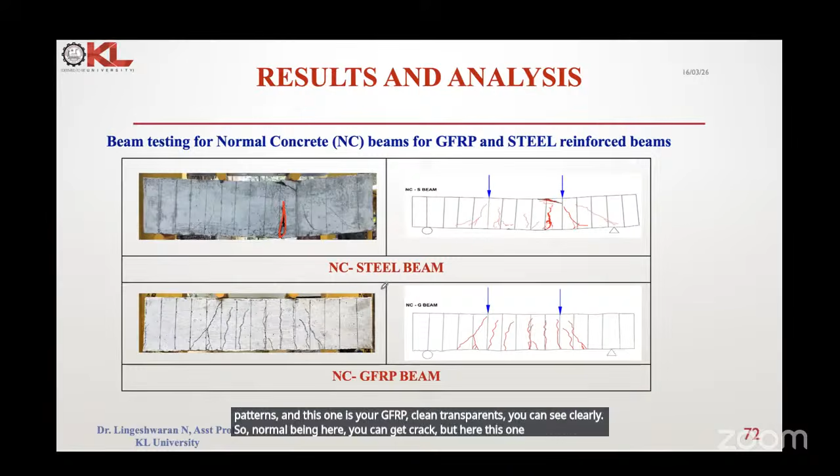You can see this is the normal beam crack pattern, and this is the GFRP beam crack pattern. You can clearly see in the normal beam here you get cracks, but here this shows normal distribution. For the GFRP, we added some 20% fly ash. This is the beam testing for normal concrete beams with GFRP, and the steel reinforced beams.

Fourth, we tried to work on a big area of fiber reinforced concrete beams under vertical loading. We went with different types of fibers like steel fiber, glass fiber, polypropylene fiber, and hybrid fiber beams. So we mixed steel plus glass plus polypropylene - that's what we tried.

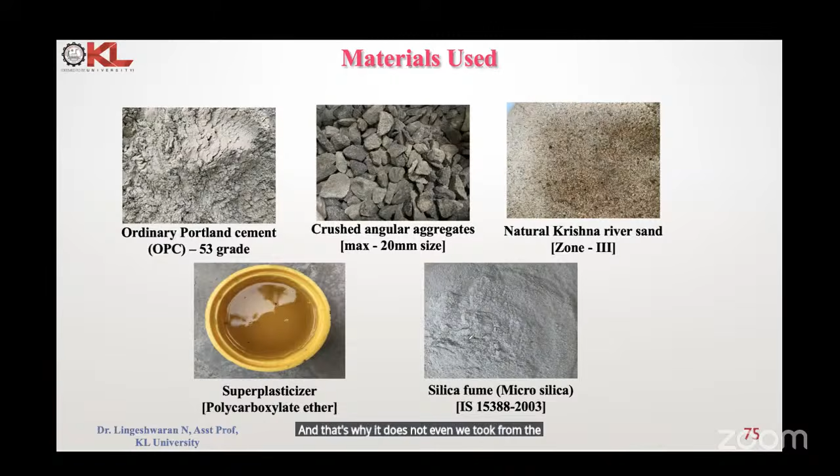These are the materials we used, like OPC, 20mm size aggregate, and natural Krishna River sand, and super plasticizer we took from the local distributor, along with silica fume and micro silica.

These are the steel fibers we used - you can see the properties like mechanical properties and chemical composition. Then here are the glass fiber properties, and this is polypropylene fiber. We used more than two combined, mixing polypropylene and steel, mixing glass and polypropylene - that's how we came up with hybrid fibers.

These are the specimen details we followed, like reinforcement with 2 numbers of 12mm diameter top and 2 numbers of 12mm diameter bottom bars. These are the normal conventional methods of how we do structural design in RCC. That's how we did it and proceeded.

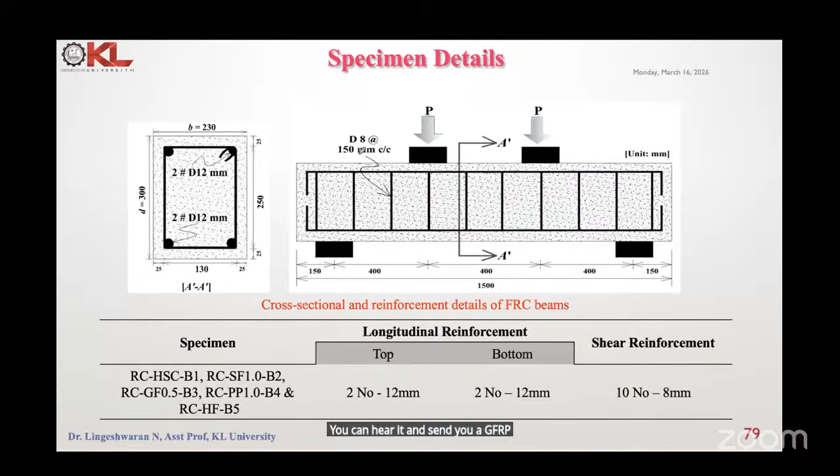Even with hybrid fiber, you can change your GFRP bars or stirrups - you can go with GFRP bars. You can try an attempt, and if you get good results, you can make it a patent, and publish it to make researchers and clients aware.

These are the different mechanical properties we tested, like cubes, flexural beams, and cylinders. This is the test specimen of the beam, then the beam cast for placing in the loading frame. You can see the loading procedures, how we set everything up.

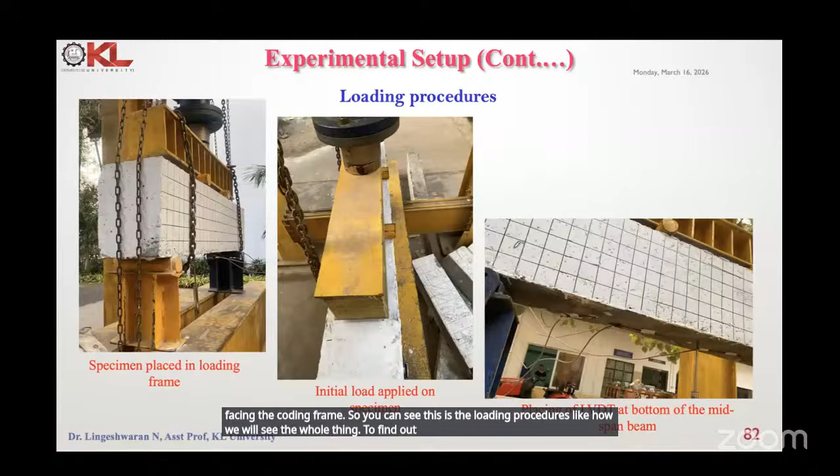We used an LVDT machine to find the exact crack in millimeters. These are the different properties with steel fiber at 0.75%, 1%, 1.25%, glass fiber, polypropylene fiber, and hybrid fibers. These are the compressive strength tests from 7 days to 28 days to 56 days, shown in the graph of compressive test results.

These are the different failure specimens at the test. This is the split tensile strength test we did for the same compounds, and this is the flexural beam test, done on the same compositions to know about the mechanical properties.

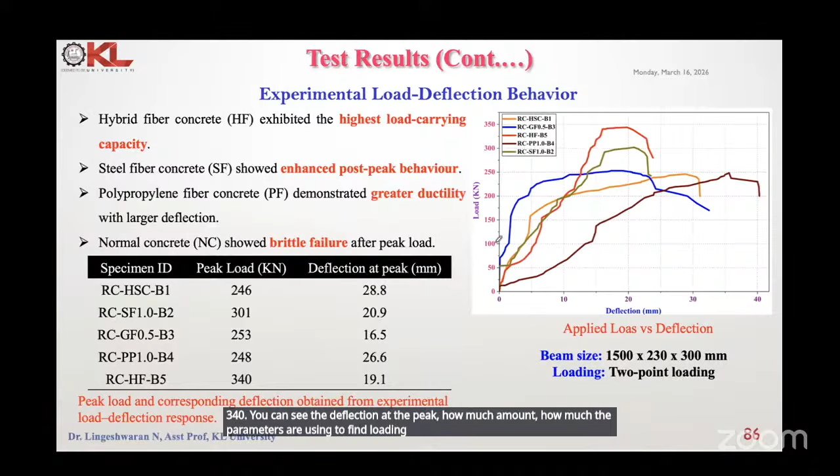We even did stress-strain testing, and finally we found the load versus deflection results. You can see the beam ultimate load was 246 kilonewtons, followed by 301, 253, 248, and 340. You can see the deflection at peak load, showing the parameters using 2-point loading - this is the result we got from the last case.

These are the different crack patterns for the nominal concrete mix and steel fibers - this is the control crack, ductility, and failure mechanisms, all those things. We did the same analysis with ANSYS as well.

So once that is okay, we are ready to go with the ANSYS. They went with ANSYS also and found out the crack patterns. It matched around 10%. You can see here the different specimen IDs and failure patterns for the experimental result and the numerical result, and the difference is around 10%. So this is about the experimental and numerical result.

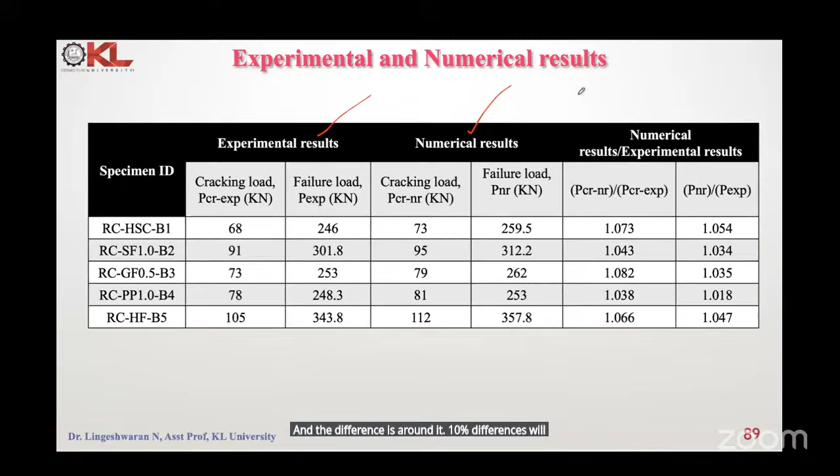So these are the publications. We are working on more projects, like how to make the client convey to work in real-time projects like FlyAsh, GGBS, Cocofine, Alcofine, or GFRP rebars. Even sandwich panels we are working on and we are ready to inform the clients.

Why? Because so many villas are being constructed for people with less income, this scheme is implemented in Andhra Pradesh. They've given the land, so they want to construct. If we get the time, we are ready to say more about those things. But to convey everything, we should have our clear project vision, the patent and everything will be there so we can convey it to the client.

In the last 2 years working with clients, if we are ready to explain all these things, they are not ready to accept it and they are not ready to implement it. But when they get any problems, they will come to us. At that time we will say these are the materials; if we use them we will save the project, and at the same time we can go with the resources.

So when I informed about 10% flyash in the podium slab, like how I previously shown in the commercial building, the client was very happy about that, and he completed the remaining slabs with 10% flyash. I convinced him to go for 20%, but he said he wasn't ready. Due to the PT slab and all those things, he went with 10%.